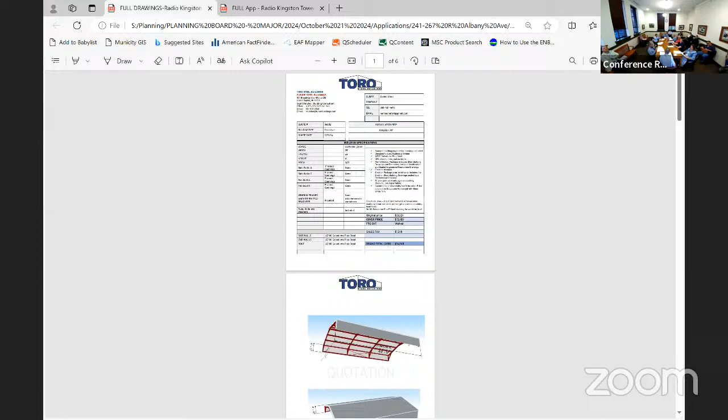Any changes? Because we have some storage containers down there we're going to discuss. Correct. Also a solar array, so nothing's changed with anything there. So this is just with the tower, this is for the renewal of the tower. Is there any other new entities that have co-located on the tower, or is it just— No. Okay, thank you.

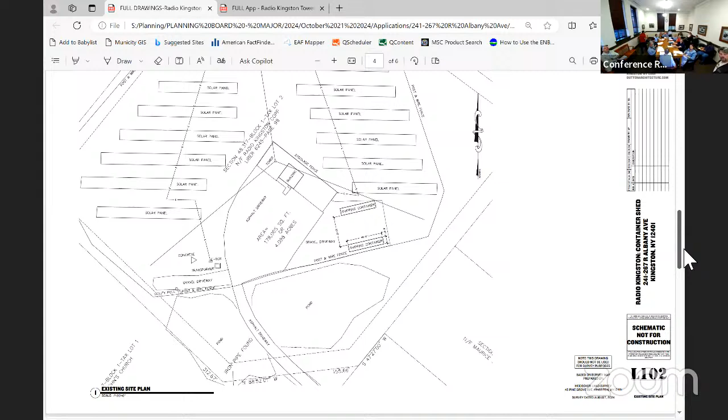All right, you want to speak to the storage containers? Yes, so when they came forward for the renewal, we recognized that there were two storage container units on the site. Scott and I met with the owners and some other city reps, and we discussed that storage containers aren't necessarily allowed anywhere within the city of Kingston under the new form-based code. Scott presented a proposal to tie the two containers together utilizing a roof system, which would be on a steel frame.

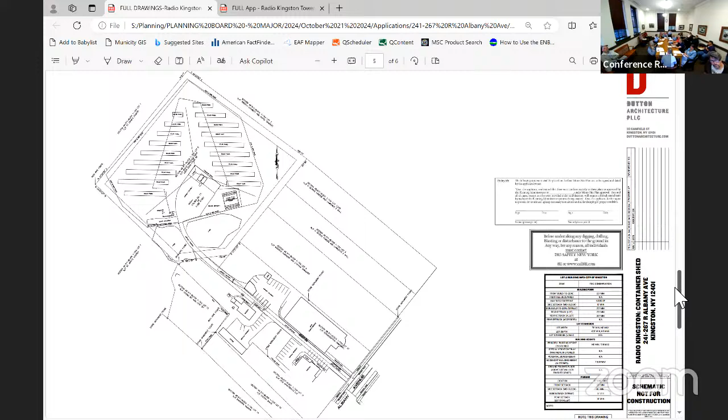It would be a metal roof on a steel frame, not fully enclosed, but it would allow for pass-through and parking of vehicles affiliated with the radio tower business. We've had a couple of meetings, and the detail of the structure is in your staff notes. There's no additional lighting or any other features to be added.

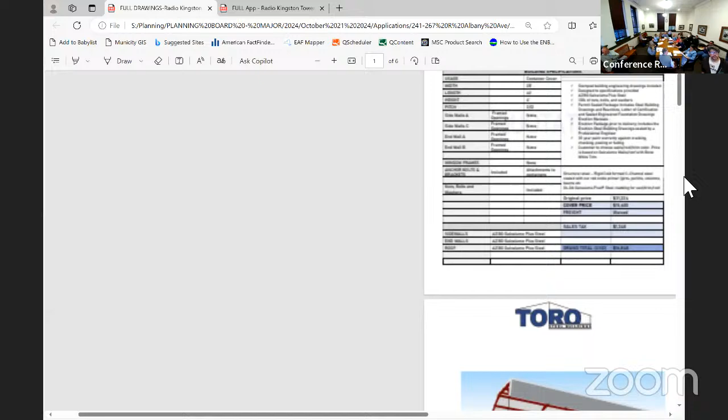What are the storage containers actually used for? What are they storing? What do you use them for?

We carry a lot of redundant materials and parts for everything from generators to the RF materials used for broadcast operations. We also have additional equipment down there for the community event production services we provide to the community. So it's a base of operations, mostly equipment, redundant parts, and a variety of things we use in our operations.

Okay. One of the things we would recommend is that this is a radio transmission station providing a certain public service. We would recommend that the board authorize the special permit renewal conditionally, with the containers and the roof structure being worked out between Building Safety and Corporation Counsel's office.

They've presented case law and an argument to us and Corporation Counsel. I believe that's under review right now, and they're going to work out whether they'll ultimately be required to obtain a variance for the containers, or if there's another option, such as siding the building and encompassing those units within the structure itself. But those will be discussed with Building Safety and Corporation Counsel. The structure itself meets code, and that's what we're doing.

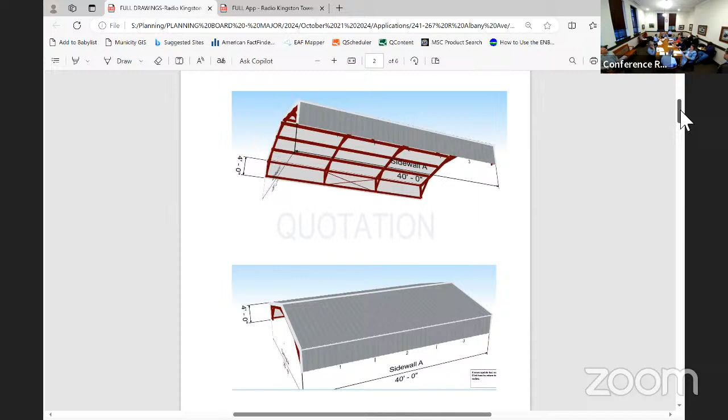Otherwise, yes, that sounds reasonable I think. Does the rest of the board agree with that? Yes. Okay, so we'll work that out with Building Safety and Corporation Counsel with the applicants.

What was the last term with this? What was the last period? With renewals, we're trying to get special permits to come due in August, when this board does not meet. Under the new form-based code, all special permit renewals with no changes affiliated are an administrative function through our office. We still have public hearings, but during the month when this board doesn't meet. So I'd make it a year, or whatever it takes to get to August of '26. I'm fine with all this.

Okay. Is everybody else good with August of '26 to come back?

Is this roof going to cover those shipping containers, so you won't see them from the street? You don't see anything now. This is way down behind the Temple, the synagogue on Albany Avenue. They pass through on an easement over their property through the parking lot, and then it goes down behind that in the lowlands area.

So you won't see them from the sky. Okay, any other questions from the board? Under SEQR, this is a Type 2 action, so no further review by the board is required at this time.

Okay. At this time, I'll make a motion that we approve item number 6 for a period to August of 2026, with board policy 6 and conditional approval. Applicants will resolve the shipping container issues with Corporation Counsel and the Building Safety division.

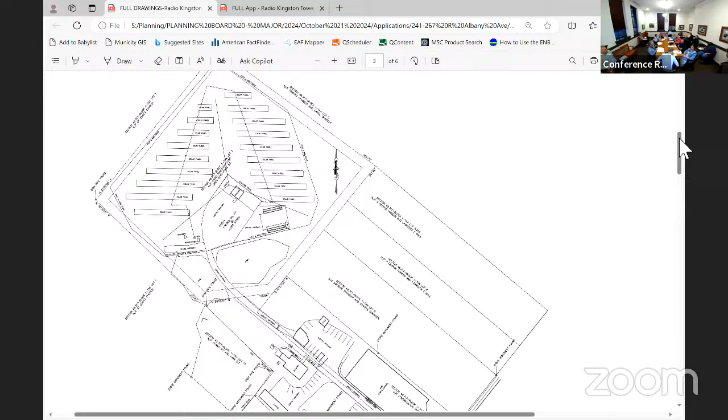Hi, I'm Anthony Kinlock, I'm the owner. My landlord, West Shore Trust, is not here to represent.

So all we're doing tonight is the public hearing, because this is going to come back to the August board, right? We're talking about just the last applicant. So really there's nothing to discuss for you tonight. I'm glad you showed, thank you. Of course. So do we have to establish... no action needed. We just felt that since this is an administrative action requiring a scheduled public hearing, it would be simpler to hold one evening with one hearing and take care of it. So there's no comment, you'll be hearing from us administratively. Perfect, thank you so much.

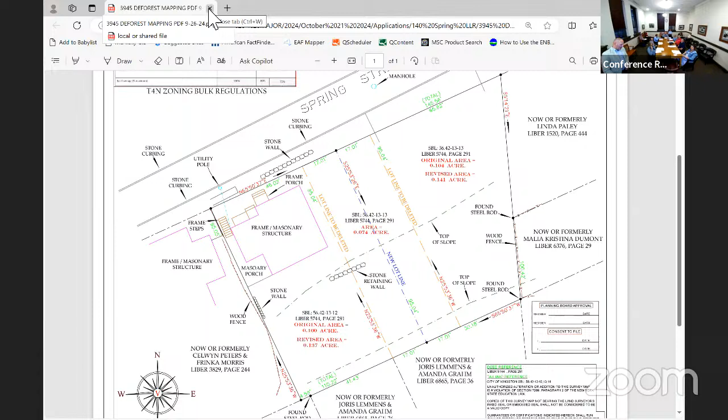I am representing John and Melissa regarding a lot line revision at 130 through 140 Spring Street. My clients own 3 consecutive lots, tax lot 12, 13, and 14. The purpose of this is to delete lot 13, the interior lot, and split it in half, awarding half to lot 12 and half to lot 14. Keep in mind there's a typo here, this should be 14, so we're speaking of 12, 13, and 14. Half of this lot will be given to lot 14, half will be given to lot 12, creating a 3-lot to 2-lot lot line revision, creating more of an available building lot for 14 and adding 17 feet of land to the structure lot, which is lot 12.

Mike, maybe you can speak a little to the slope of this property. This is on the end of Spring Street, which is one-way, a very narrow roadway. But the top part along Spring is really the only developable portion of these properties, because there's a dashed line pretty much halfway through, and at that point it takes a steep incline downhill pretty quickly. It's not steep to the point of not being developable, but material would need to be brought in if you were to develop from that point down. As long as we can meet the zoning requirements for the T4N within this area, a site plan will be prepared when the time comes if this lot is to be developed. But there's definitely a developable area, and adding this 17-foot portion to lot 14 adds further developable area. That is the purpose of this lot line revision.

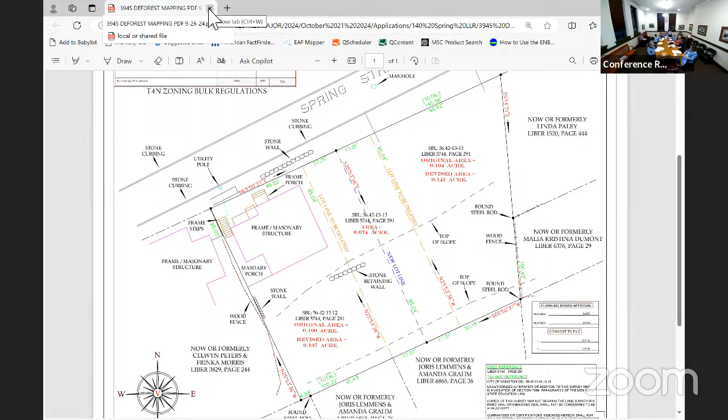Section block and lot is 56.49-3-10.110. Zoning determination, transect zone T3N, Ward 9. Arthur DeGraff Jr. is the applicant owner. Anybody besides the applicant owner wishing to speak on item number 5?

Yes, hi. Okay well, anybody else, we're gonna have you sit down right here. Oh, I get to sit? Because it's a public hearing, huh? Because it's a public hearing, anybody else can weigh in if they want to, so.

All right, so state your name for the record please. My name is Valerie Tolley. I'm Arthur DeGraff Jr.'s sister. Our plan is to subdivide the property back out, and then I will purchase it from my brother and eventually have a house for him.

Okay, hopefully. Now I was reminded that you appeared here at one time to combine. My father did. Okay, so now we're going back to the original. Don't ask. That's okay, this happens, these things happen, you know?

Just so that you are aware, under the new form-based code, should you choose not to do your construction and build on this, the new code won't allow the two to be combined back into a single parcel again. Just so you're aware of that. Fine. All right, it has maximum widths now, where it never did before, so now it would exceed that.

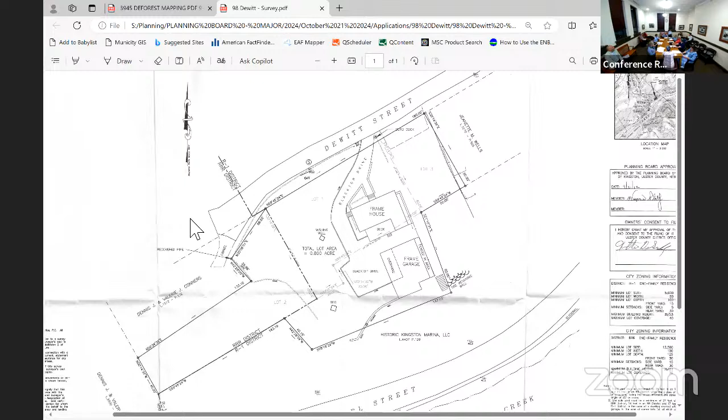So we actually need a new subdivision map. This is the old map that was used when they combined the parcels, but we allowed them to use this for purposes of presentation. So we will require the new subdivision map showing the subdivision as it's being presented.

The resultant parcel descriptions will have to be provided to us, so that's the new description of the lot without the piece that's going to be taken, given to you, and then a description of that parcel. Your surveyor will do that. We'll need one Mylar and five paper copies.

All will have to be signed by the owner before they come in for the chairman's signature, and then you will have to file with the Ulster County Clerk for it to become legal, and you'll get all this in a letter.

Awesome. Okay, as I said, put the application in, I wasn't the brightest crayon in the box. That's what board policy says. Yes, all of the items that Sue just mentioned, she just included board policy 6.

I'm going to encompass all that into a motion to approve item number 5. Do you want a second on that? Second by Robert Jacobson. All in favor? Aye. Opposed? Carried. Thank you very much.

Thank you, have a good night. You too.

Okay, item number 7, old business?

436 Broadway, site plan to convert a single-family residence with ground floor commercial to a 5-family residence with a major waiver for exterior rear entrance to the upper residential units. Section block and lot 56.26-6-36, transect zone T5MS, Ward 9. Ron Faya is the applicant, 10th Street Enterprises LLC is the owner.

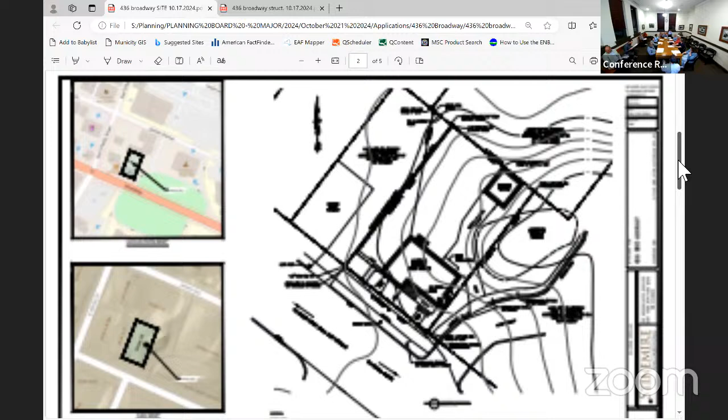Right, then we met with Sue and we kind of rehashed the whole thing. So you have an entrance now from Broadway and an entrance from Flannery Lane coming in, right? So that really takes you out of the major waiver.

Right, but it's a significant burden to the client. It's a $100,000 addition for stairs, basically.

I understand that, but we have a new code in Kingston. I get it, I understand that. But the code has major waivers built into it, doesn't it? Is your client still looking to pursue the major waiver request?

I just would like to have a discussion on it, I guess. He actually should be here. I told him 6:30. Yeah, I'm sure he's on his way, didn't expect we were going this quickly.

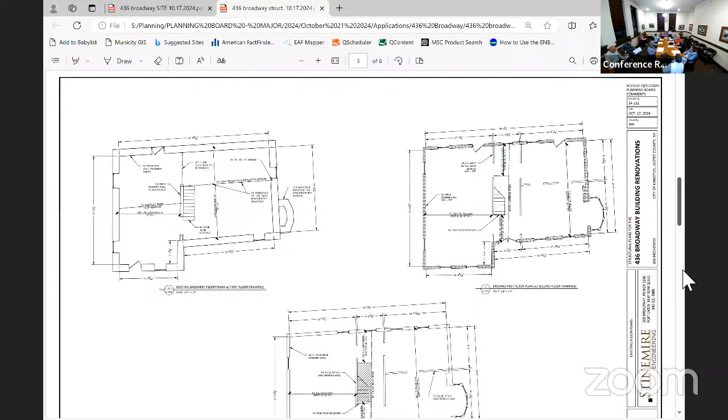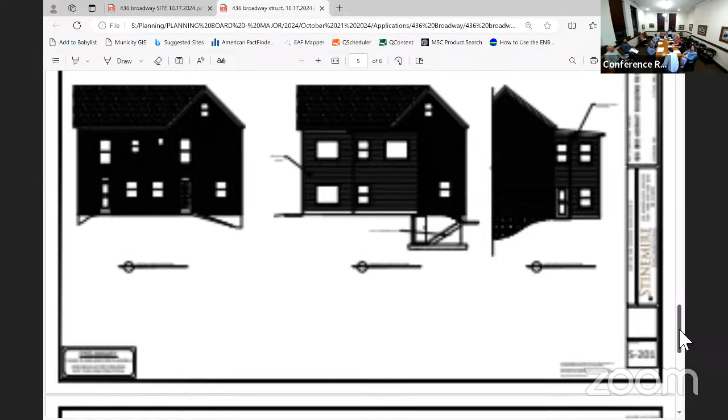Can you just have major waivers for a second floor just from the rear? No, first of all, the new code, when you convert, like this is a full conversion of a building, adding new residential units. This also involves the demolition of the detached garage and new construction of a garage in the rear. So under the code, residential units are required to have direct access from the street. It can't be from the rear, where in the old code this would have been acceptable.

But under the new code, under the form-based code, it's meant to create walkable, pedestrian type streetscapes, and that's where the frontages are looked at. The building type specifically says that the frontage will be from a street. Now Flannery is a street, so that's why they can use the side street as one of their access points.

We talked about, because there's going to be a pretty extensive gut internally in this building, using Broadway as the sole entry and having the exterior stairs be just secondary. But that is not going to be possible without shrinking and maybe redesigning the interior layout, and possibly losing a unit, going from 5 down to 4, or reducing the size of the units on the second floor and possibly the first floor slightly, to allow for an internal staircase using the front entry that would have to be wrapped around.

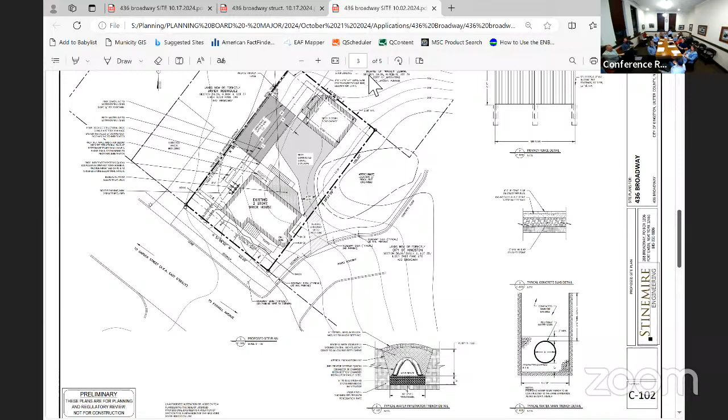So you still need that stair tower out back? No, you would not. You could get, the entire second floor would be 1 unit instead of 2 one-bedroom units. But once you're more than 2 family, it's a commercial building, and the stair requirements in the commercial code are much more spacious.

They take up a lot more space than a residential stair. Even before the new code came in, on different projects that would come through we would have to ask the applicants to have a plan A, plan B. Plan A is the major waiver, plan B is the $100,000 stair, or it could also encompass reducing the number of units inside - have a plan C. That's very true, and applicants have reduced the number of units in the past too, so these are all options.

Well, that's why I'm bringing it up. For understanding discussion - you're trying to get the most bang for your buck with your client, and I see that. And with the new code, we're gonna be hearing a lot of these types of things with major waiver requests, so I understand that.

I do feel strongly, like Sue and staff does, about not granting a major waiver for this because the parking's not a requirement. So I don't know if you have to hammer that rock outcropping out of there, but again, we've asked clients to have plans A, B, and C, and it's a back and forth and we come to a compromise. I don't know how the rest of the board feels about that.

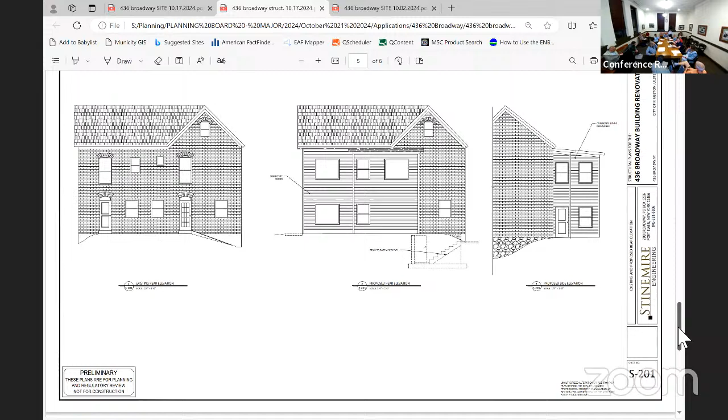And I think we were discussing, was that a reasonable distance or? That's kind of the tricky situation. There's no distance requirement in the zoning code. I don't know about the ADA code, but no. No, they're in the rear of City Hall.

Access handicap parking's in the back. It's across Broadway and down a side street. It's not like it's in close proximity, but there is one there if you want to consider it. I mean, there's no language that defines how far it can be, but we've identified that one.

Okay, so we've identified that one, so we can check that off. Landscaping, we're just going over - did we finalize those plans yet? They provided a landscaping plan out front.

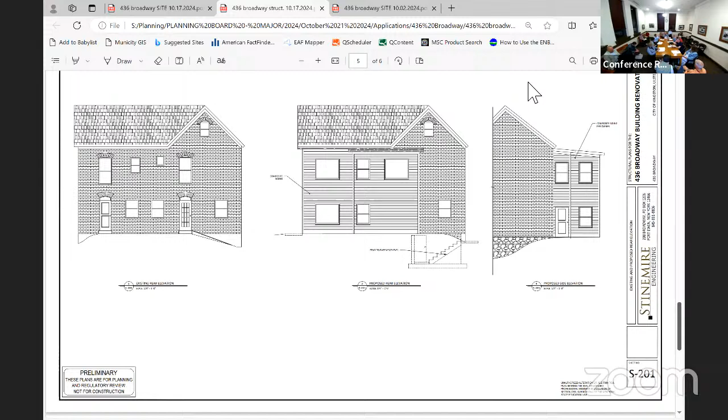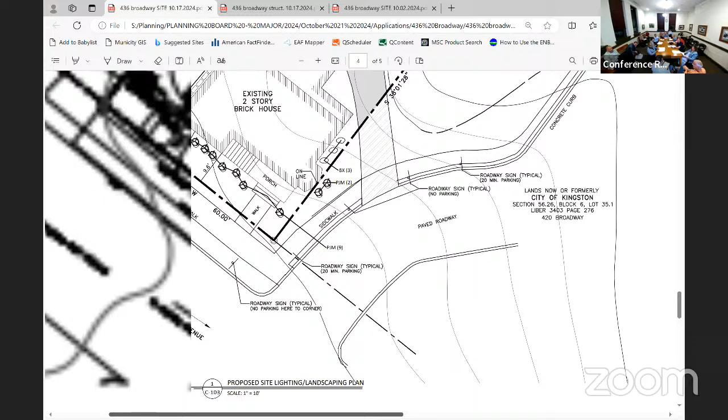Ron, you want to speak to that? What your intention is with landscaping along the front facade and along Broadway? I know you identified some shrubbery and that - I don't know if you identified any trees or anything in the front. What landscaping do we have? We just have some low shrubs, some evergreens and some rhododendrons called out in front.

The existing landscaping that's there is pretty much shot. Is there any particular landscaping that you like? Some tulips, flowers, evergreens, rhododendrons.

Or is there a tree? If you give us a list of what you'd like, I'll make sure they're there. We can leave that at the staff level, but we typically do that - we'll leave that at the staff level for the consultant, okay.

All right, the refuse storage, where's that gonna take place? It's just underneath the stair. There's an exterior stair on the garage, so coat storage underneath there.

Did you have a chance to talk to building safety about that? There was another structure on Broadway that had the cans stored underneath the staircase, and they disallowed that. They had to find another location. Was it an exterior staircase? Yeah, it was an exterior staircase. I believe it was metal. I think it was wood. Was it wood? I don't remember.

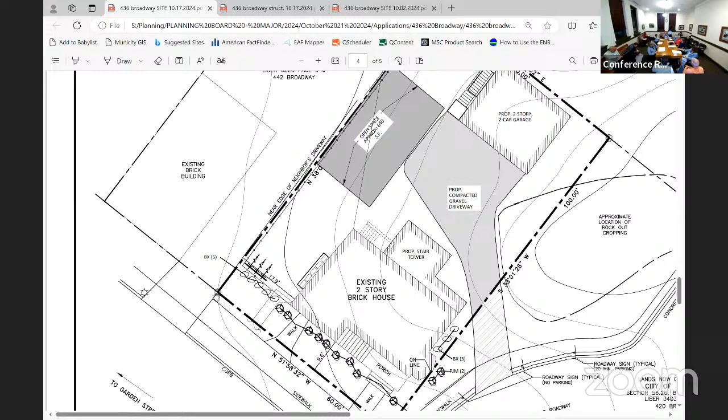The payment in lieu of parkland, there's one unit that requires that fee. Have we gotten a recommendation back from the rec department yet? Did we send this to Rick? I don't recall seeing anything. This was one of the ones we sent last month or back. They didn't have quorum for a couple meetings. Okay, so we go ahead and do the assessment, and if we find something different... and everybody's good with the assessment for the single unit above four? You want $3,000 for that? Okay.

You already discussed lighting and utilities, right, the last one? All right.

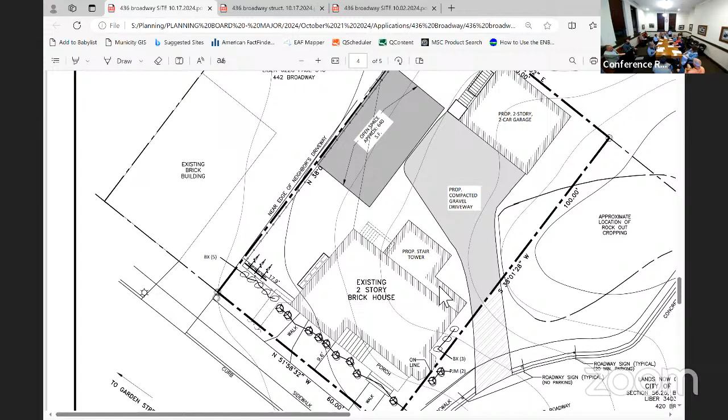Okay, so this is an unlisted action under SEQRA. The short environmental assessment form that staff has indicated is in order. At this time, I'll make a motion that we approve it. Do I have a second? Second by Robert Jacobson. All in favor?

Wayne Platt is a yes. Charles Palaco? Yes. Robert Jacobson? Yes. Matt Gillis? Yes. Vince Archer? Yes. That is approved.

Okay, thank you again. All right, so do you want to go over the list of policies and conditions? Sure, so I have board policies 4A, 6, 7, 13, 17, 17A, 20, 21, 23, and 24.

This will be an approval for 5 residential units in the main building, with there being no residential use in the new rear garage. The enclosed staircase will be in the rear with access to Flannery. So there is no major waiver being granted. They will comply with the handicap requirements in the code.

Payment in lieu of parkland will be remitted in the amount of $3,000 for the 1 unit above 4, and that will be remitted before the building permit is issued. Final landscaping and refuse will be worked out with staff.

So all of those are being formulated into a formal motion to approve item number 7. Do I have a second on that? Vince Archer with a second. All in favor? Aye, aye. Opposed? Carried. Thank you, gentlemen.

All right, thank you. Thank you. Good night. Good night now. You want the chair here or should I move it? You can leave it there. Leave it there? Thank you.

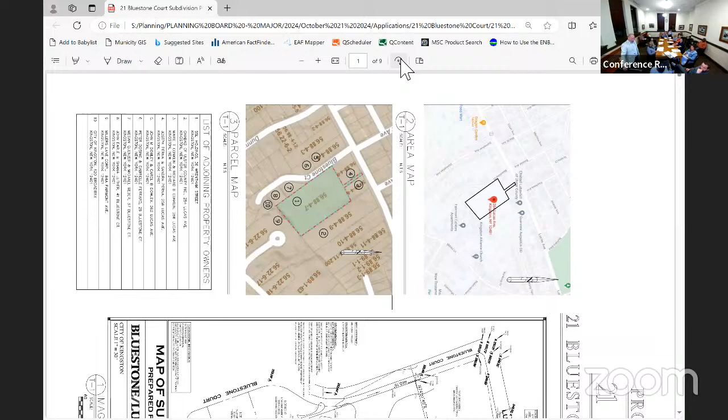Our streets are proposed to be designed with a C4 general wide road standard. We meet all the zoning regs. Again, this is a sketch plan. This is by no means a final subdivision plan. And we are here tonight seeking requirements, suggestions, and comments with regards to moving forward with our proposed 15-lot subdivision at 21 Bluestone Court.

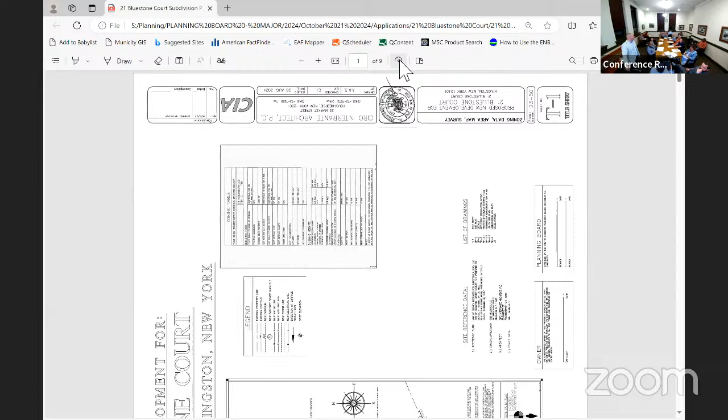So just a little bit of background for everybody. You all remember this was a multi-family residential project before under the old zoning code. So when the new zoning came into play, this parcel got a designation as a special district multifamily. Given some of the history with some of the neighbors and the concerns that had been raised, the owners then...

...gave this some thought and have decided to go a different route, and this is to do an actual subdivision of individual parcels. Under the code, this is considered a large lot parcel, which requires them to either choose between a walkable neighborhood plan or a conservation village plan. So they are choosing a walkable neighborhood plan, and with the adjacent parcel being a T3N, they can use that as the basis of their subdivision and developing their lots with the provision that they have at least 2 building types that are proposed.

So in their preliminary plans, they've proposed 2 building types: single family detached and duplex. They have some examples of what they're thinking, and we'll talk about that later.

The plan still has access off of Bluestone Court, which is a city street, and the roadway will need to be reviewed and approved by our city engineer. It's a dead-end roadway with a turnaround at the end, and under the new code that's allowed with a minor waiver.

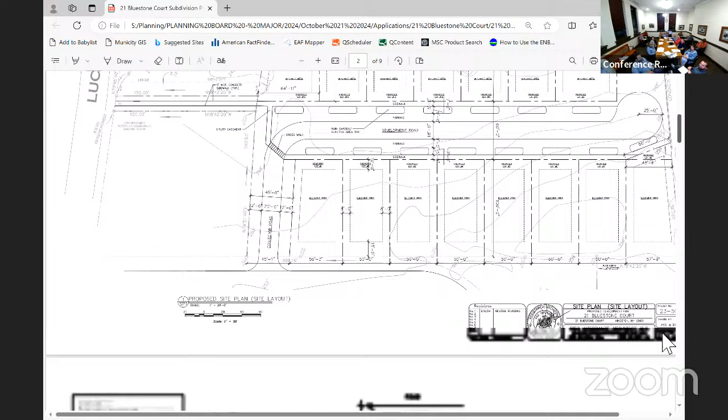Kyle, can you flip to the proposed buildings? Under the form-based code, you're proposing some building types that show the garages jutting out from the front of the actual plane of the face of the building. Yeah, those would not be allowed under the form-based code.

We realized that after the fact. What we had done, just so you're aware, is pull elevations for footprints that fit within the setback in terms of width and length. The building plane, that's what's within the face of the building, would be acceptable.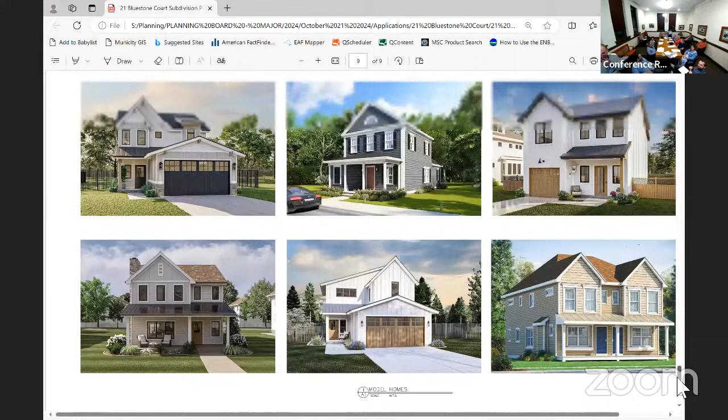We wanted to show just a few different styles, but we can easily remove that front garage and finish the front. Luke and I years ago did 36 Schufeldt, which is a similar Kingston 2-story with a front porch, with a garage on a traditional lot, just like this.

So this bottom one in the middle, we have another option where the garage isn't jutting out in front. The top corner is similar. When it's flat, like the one at the top, that would be acceptable. It's a nice house.

Yeah, I like the design.

So Alderman, perhaps you have a question. Yeah, since I represent Ward 1, this is in my district, and there was a question that came to me. The residents know this is coming and knew it was going to be presented tonight. One person went online, looked at the plan, and his question relates less to the design and more to why the road is coming into Bluestone and not going out directly into Lucas, which I understand was part of the original plan.

They were just concerned as to why the road doesn't go straight out to Lucas. Well, it's because the road doesn't match up exactly with Boulder Avenue, it's not a perfect cross section. So originally we had a traffic study done, and we can share that report with you. The traffic study found it was much safer to enter and exit this development off of Bluestone Court. Ulster County Planning Board, if I'm not mistaken, agreed with that decision.

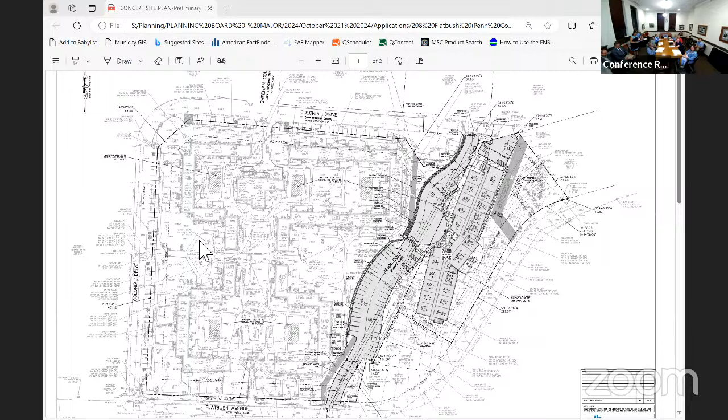Over 5 years, the Housing Authority has been collaborating with the city and HCR, the State Division of Homes and Community Renewal, to develop a plan to redevelop and reposition our entire portfolio. Phase 1, the renovation of Van Dyke, was completed this year, formerly known as Stuyvesant Apartments. Tonight we want to focus on Penn Court, Colonial Gardens, Wiltwyck. Although Wiltwyck and Colonial Gardens do not need any zoning or planning variance, we're going to focus on Penn Court, which is going to be a full demolition. That building is going from a 32-unit site to an 82-unit senior site.

That increases our affordable housing to 550. We have already submitted a preliminary application to HCR for the necessary funding, the same agency that funded Van Dyke. We're working towards a financial closing in June of 2025, which requires us to have all planning and zoning approvals as well as a building permit in place. So we would greatly appreciate the board's prompt review of our project once we submit a formal application, to ensure our continued planning efforts with the city and the state. Thank you, and now I'm going to introduce Mr. John First to begin our presentation.

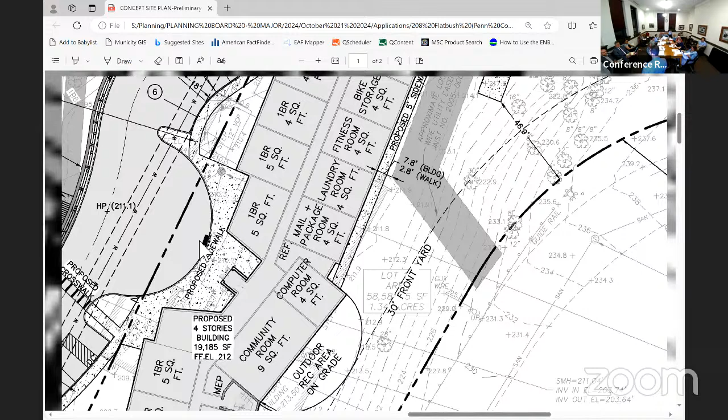So all access points into the structure are going to be from the interior, not from anything along the backside, correct? All main entries will be. So the main entrance will be coming off of this drop off here. There's about, depending on where you are, roughly a 20-foot drop between Flatbush Ave and the backside of the building. So all of the entrances will be here, as well as the exits going into the parking area.

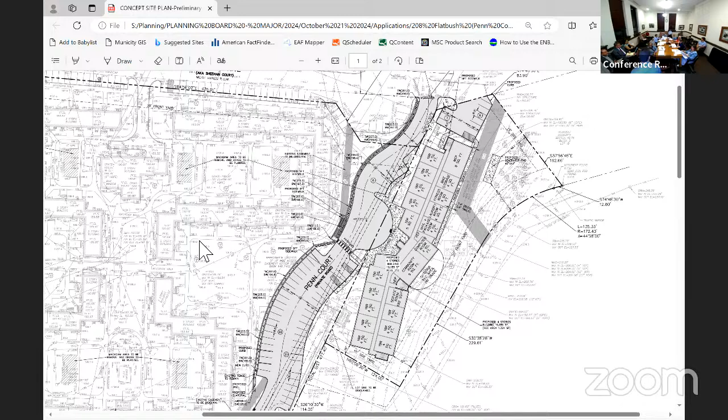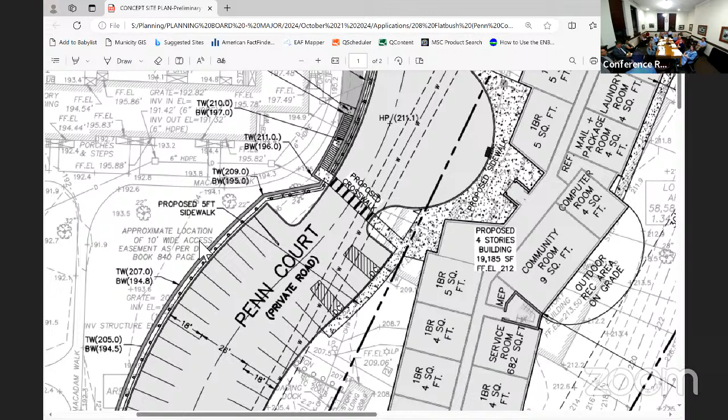So we're looking at a couple of years here for demolition and construction. Right now our discussions with the state are that they're trying to slot us into their funding cycle for next June, which means we'd have to relocate everyone by the time we close. We're working with the housing authority to do that. Assuming we close in June, we'd move immediately into demolition, and then we're looking at probably an 18 to 24 month period to demolish and reconstruct the new building. So you have to have the people relocated before the state's financial closing? That's correct.

What is on the roof? On the roof, the plan right now is to put a solar array. We're working with a solar team to figure out exactly how that's going to look, so it doesn't adversely impact the look of the site as well as the building itself.

What about all the heat pumps? We have mechanical rooms at the northern end of the ground floor. So these are geothermal? When you say heat pump, do these have units outside like air conditioners, or are they geothermal where they're internal, using the ground?

I don't remember if we're doing pieces, so let us get you an answer on that. We don't want to give you wrong information. Because if there are heat pumps and air conditioners, where are they going to be housed? What are they going to look like? We can get you that information. I thought you'd tell me they were on the roof. Will each unit be individually controlled for heating and cooling, or is there a master system for the whole building, or is each unit just having a normal heating system? I think we've got to get that from the MEP. Yeah, because that's an awful lot of units. That's why I'm wondering where they're all going. I thought there were PTACs, because I think that they're on this.

So eventually we'll talk about construction entrances. You're going to have a delicate balance between getting what you need done and the circulation of vehicles in and out, plus scene safety with a lot of children there. It's also on a curve, which isn't the easiest in and out, so construction vehicles, which aren't very quick moving in and out on that curve, could be disruptive. You're also building the road now that's going to go all the way through, correct? Yeah, correct. So the project has a through road. Right, but as Wayne was saying, construction vehicles going through the site could also be extremely disruptive for the tenants currently there in Colonial.

What kind of shared services do you see this new facility and the existing housing facility having? My goal is to bring in other resources to enable and improve the seniors' lifestyle, when it comes to food and help, working with agencies within the community to assist them with diabetes knowledge, blood pressure, and things like that. Little workshops, a computer room, just to keep their minds going.

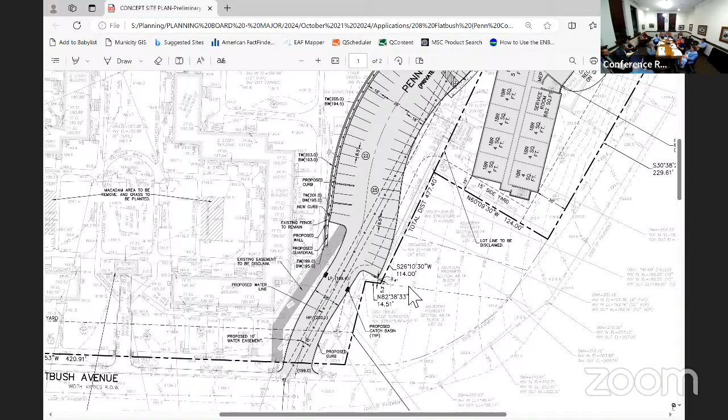You might do a site visit, and with the site visit I'd extend the invitation if they can make it - the city engineer, our DPW, our water department, our building department at a minimum. Those are typically the ones we ask to join us, as well as our own council liaison, but the alderperson who represents this board would be invited as well.

And you'll coordinate that? Yeah, I will. Okay, whenever you are ready. We'll be available - I'd like to do it this week, it's nice weather. I don't think I can pull that one off.

So, are there any other questions at this point? Is there anything else that any board member feels is important for the SEQR process that they should start looking at and evaluating? I guess for tonight, right.

The only thing that I would add, and our architects and our attorney did a great job describing the project, but I know Geralda and I are sitting here jumping up and down because this is a transformative project for the housing authority. It really addresses three major projects that need renovation, that the state needs to do something with, so that we can service the residents that are out there much better than they're being serviced now by the housing they're living in. And we can also provide additional housing.

So the board understands that part of the funding we get from the state does projections for a 30-year going forward look, so that there's funds deposited for future improvements and reserve replacements that aren't available to the housing authority now. This is not just, okay, we're going to go in, fix it, and set. It's a long-term plan to really transform the state. The state head of architecture came down, walked the site with us, and they're very supportive of the project. So I just wanted to convey that to the board.

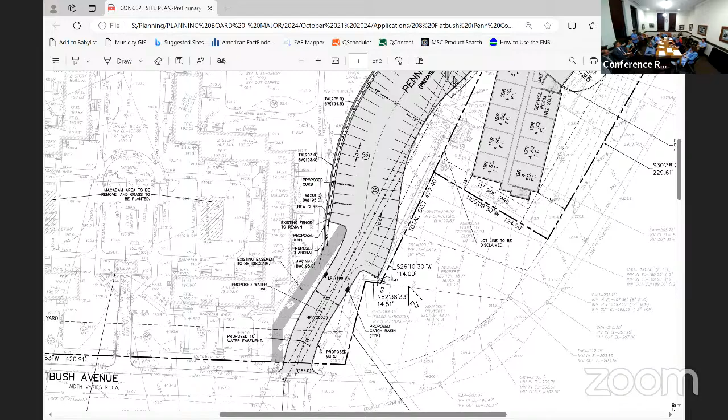Do you have any other business before the board? I do. Okay, anybody else have any business before the board?